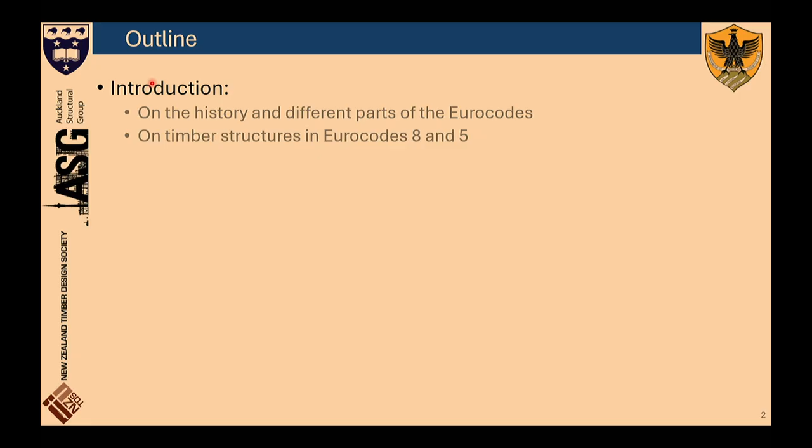Today, I'm going to share with you some facts about the revision of Eurocode 8 in terms of seismic performance of timber structures. I will start with a short introduction, quickly introducing the history and the different parts of the Eurocodes. Then I will talk about some modifications, in particular talking about timber structures in Eurocode 5 and 8. Five is timber design, and eight is seismic design. Then I'm going to give some very basics of seismic resistance of timber structures according to the Eurocode, and then discuss with you some of the main updates of the timber chapter of Eurocode 8.

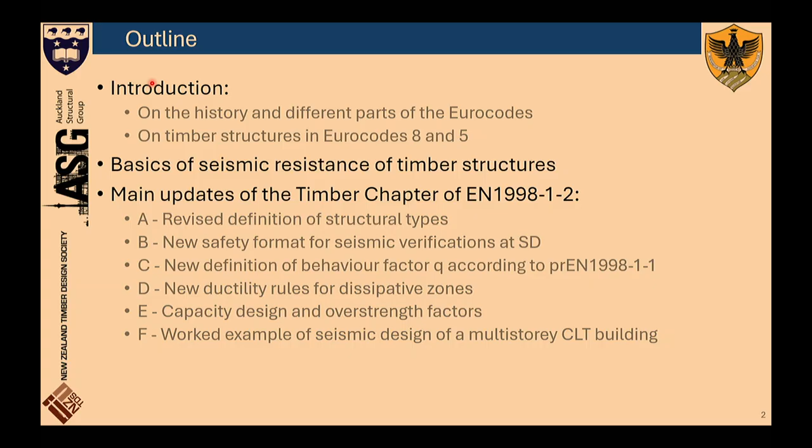We will go through the revised definition of structural types, new safety format for the seismic design at significant damage. Then we will go through the new definition of the behavior factor according to Eurocode 8, some ductility rules for dissipative zones, capacity design overstrength factors, and then I will conclude by giving you a link where you can download a worked example of seismic design of a multi-story CLT building, which unfortunately is in Italian, because the funding agency was the Italian Department for Civil Protection, and they said, we funded you, so this must be used by the Italian engineer. I said, but the Italian engineers know some English. They said, no, they don't know English, so you have to do it in Italian. But hopefully in the future, we are going to translate it also to English.

So first, history about the Eurocodes. 1975 is the year when the European countries decided that if they wanted to build a new Europe, they should make trade possible among all the countries. They identified having a common design code as a major way to avoid trade barriers - design, of course, in civil engineering. So in 1975 this idea began, and it took more or less 30 years to get the first generation of the Eurocode ready to be used in design.

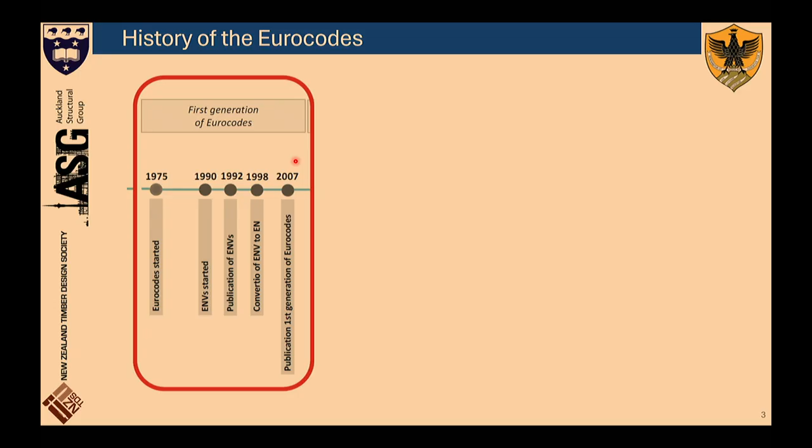Now, in 30 years' time, many things changed. You can understand, if you look back at what it was 30 years ago, it's completely different. We didn't have artificial intelligence, we didn't have mobile phones. So in 30 years, really many things changed. For this reason, in 2010 we said, okay, now that we are ready with the first generation, we need to start the new generation, the second generation, in order to implement all these changes that occurred in the first 30 years.

So it took some other years, as you can see. In 2015, we started this revision. We had what we call project teams, groups of six people, usually 2 academics, 2 people from industry, and 2 people from design offices, meeting together and trying to write the new version of all the Eurocodes. This was a long process, as you can see, and this process is still ongoing. After we write a first draft, it must go through a process of voting. All the 28, 29 countries must say yes, we are okay with this new revision, or no, we are not, or yes, we are okay but we want you to change this, this, and this. So this process took quite a lot of years.

So now we are here in 2025, and we still have to have the final vote on the new version of the Eurocode 8. Hopefully it will go well. If this goes well, 2028, in 2 to 3 years' time, will be the latest date for withdrawal of the first generation of the Eurocode. So the new generation will be in force from 2028. Look at this timeline: from 2010 to 2028, 18 years to get a new code, which is quite a lot, I would say.

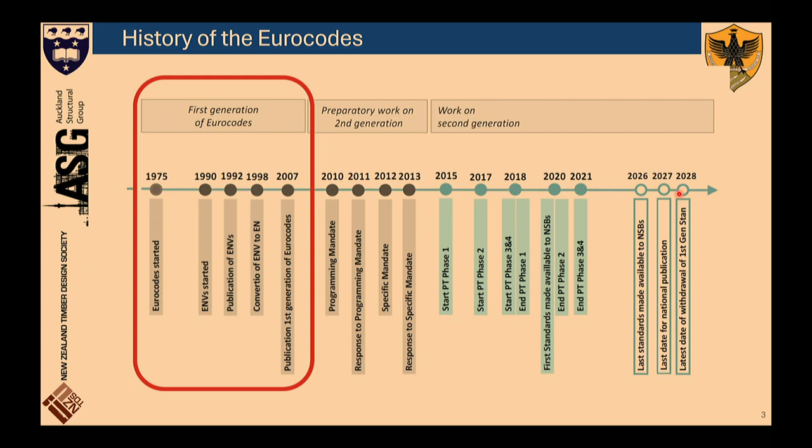Hopefully in Australia and New Zealand we will be faster than 18 years. But the problem is that in Europe we don't really have a United States of Europe, as you can understand. We have 28 different countries with different governments, so the whole process is very long. But hopefully in 2028 we will have the new version of the European code.

The Eurocodes are many documents. You can see here we go from Eurocode 0, basis of structural design, meaning limit state design, serviceability, and so on, through to Eurocode 9, design of aluminium structures. None of them is just one part, except EN 1990 which is one part. All the others have more parts.

I just wanted to highlight EN 1993, Eurocode 3, design of steel structures. We have 20 parts. So 20 parts of Eurocode if you had to design a steel structure, which is in some way a bit strange, because in my mind, when I was a student and also as a researcher, I would have thought designing a steel structure was fairly simple. Instead there were 20 parts covering all kinds of design: members, joints, silos, tanks, and so on. So altogether we have something like 40 parts across all the Eurocodes.

Now, some of those parts are material dependent. You can see here EN 1992 for reinforced concrete, steel-concrete composite, timber design in EN 1995, EN 1996 for masonry, EN 1999 for aluminium. Then we have some general horizontal parts: EN 1990, EN 1991 on actions on structures, covering everything but earthquakes, and then earthquake comes in EN 1998, seismic design, and of course EN 1997, geotechnical design.

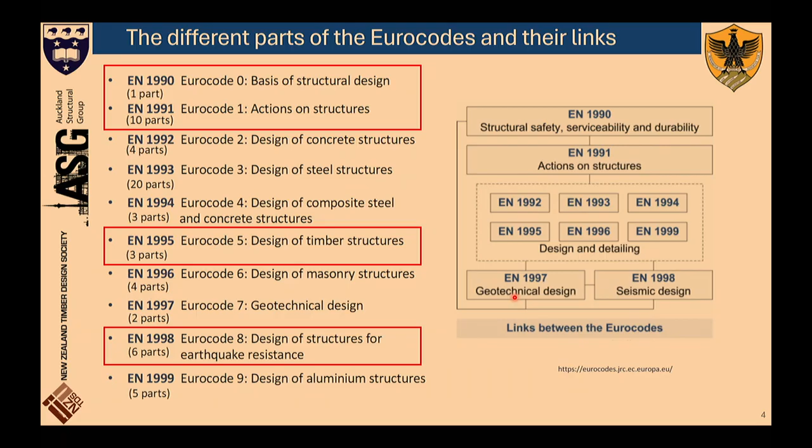So, in the current version of Eurocode 8, the timber part was only 6 pages. If you compare the current version of Eurocode 8, timber is 6 pages, reinforced concrete 40 pages, steel 40 pages, masonry 30 pages. So timber was just a fraction.

And of course we decided it was time to give more provisions to the designer, because otherwise there were just some general concepts. We were missing, in the older part of the Eurocode, things like all the capacity-based design principles and all the overstrength factors.

So in the new Eurocode 8, there will be a chapter dealing with timber design of 42 pages plus 6 pages of annex. So now in this new Eurocode we will have a similar weight in terms of pages for timber, concrete, masonry, and so on. This is very good news.

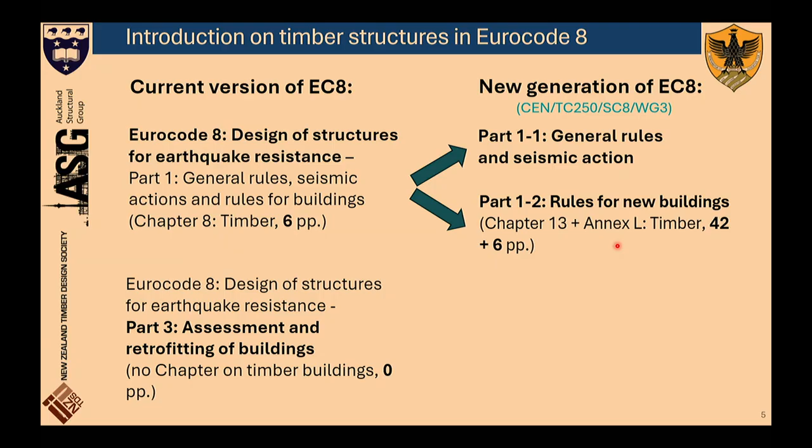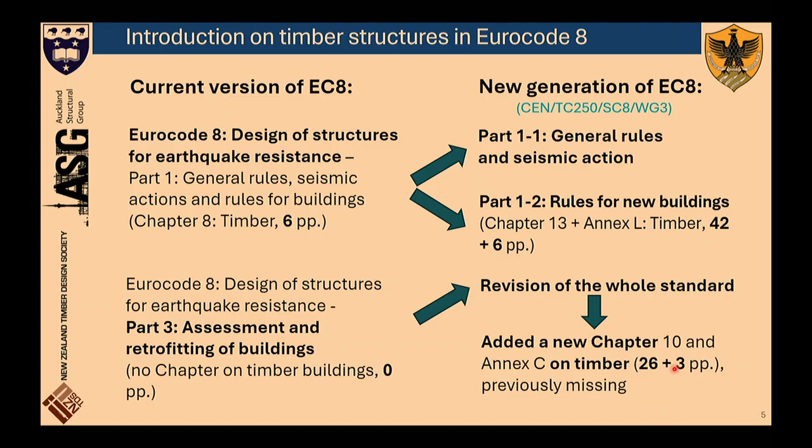Another important thing: there is also one part of Eurocode 8 dealing with assessment and retrofitting of buildings, which is very important when you are in an old country like Italy, or Europe in general. Currently there is no information on designing or retrofitting a timber building in this part. In the new part, there has been a revision, and they have added one chapter, 26 pages plus 3 pages, for the retrofit of an existing building in an earthquake-prone area, which is quite an important thing.

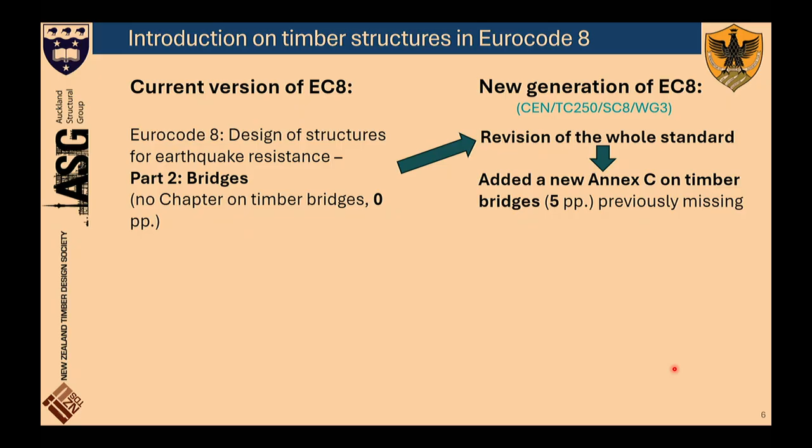There will also be one part of Eurocode 8 dealing with bridges. So if you want to build a bridge, you have a general part on bridges in the timber chapter in Eurocode 5. But then you also have one part of Eurocode 8 dealing with the seismic design of a bridge—currently no information. In the new one, there will be an annex with 5 pages. Not many, but much better than nothing.

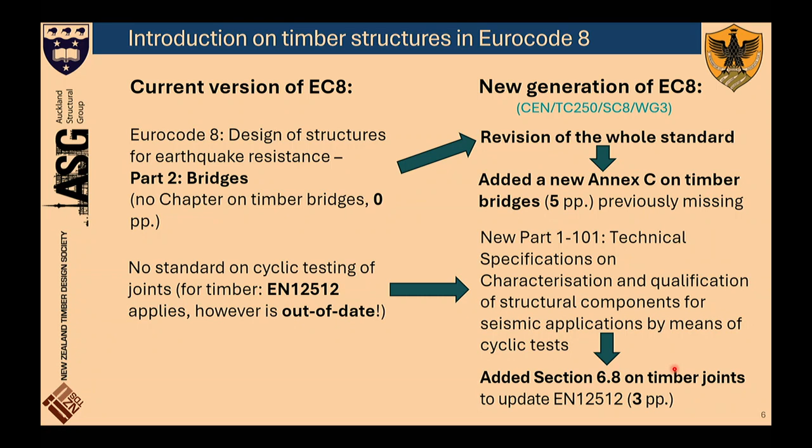Okay, I will skip this because it's not so important—it's just a design standard on how to test cyclically a timber structure. I will move instead to the current version of Eurocode 5. Eurocode 5, as we said, is what we need if we want to design a basic timber structure under seismic action. There are 3 parts.

EN 1995-1-1 covers general rules and rules for buildings, structural fire design, and bridges. All three parts have been completely revised, and there will be two new standards: one about execution, with lots of discussion about execution, because when it comes to building a timber structure, there are some things we need to check, like moisture content, etc. So there will be a standard about this.

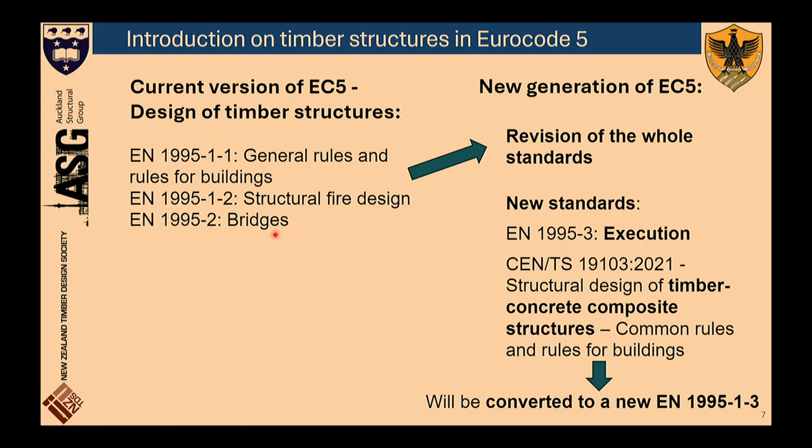And then another standard about the structural design of timber concrete composite structures. Timber concrete composite structures are being used more now, particularly in Central Europe. The idea is basically: what is a timber concrete composite structure? It's like a steel concrete composite, except we replace the steel beam with a timber beam, connected in some way with the concrete. Some basic seismic resistant timber structure, something you all know, but just to introduce some definitions according to Eurocode 8.

We will classify a timber design for earthquake action as either low dissipative structural behavior or dissipative structural behavior. Low dissipative means we design elastically in some way, and we just consider a small value of the behavior factor Q. The behavior factor Q is what in the New Zealand standard is called K mu. It's basically the value we divide our elastic spectrum by in order to take our seismic action into account.

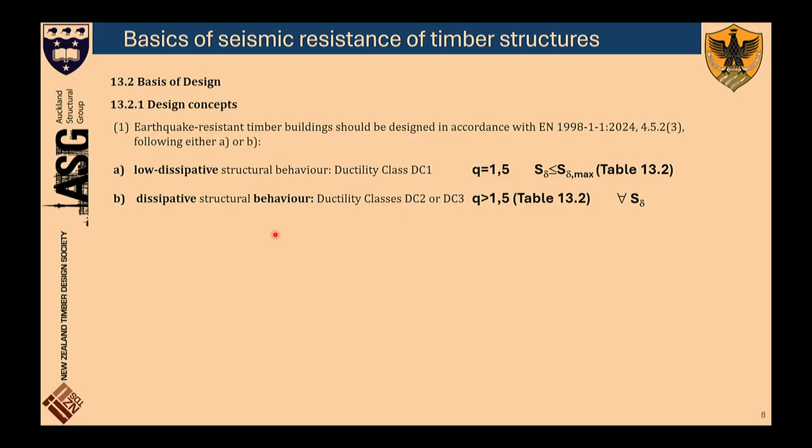Dissipative structural behavior instead means we are designing a dissipative structure so that we want some energy dissipation. In this case, we can get a higher value of the Q factor, in general more than 1.5. So in Europe now, for low dissipative structural behavior, the behavior factor is 1.5. For dissipative structural behavior, the behavior factor would be greater than 1.5.

Just to recap, if you have to design a small building like this for seismic action, what we need to take into account is what we call the seismic weight, which is the permanent action plus one fraction of the imposed action. So if there is snow, for example, if we are in a non-snow area, psi 2 would be 0. If instead we are at a height of 1,000 meters, psi 2 could be 0.2 or 0.3.

The seismic weight is multiplied by W, divided by G, which is the gravity acceleration, so W over G is the mass of our roof. This is multiplied by a coefficient lambda, then eventually multiplied by SR, the ordinate of the reduced spectrum. We have what we call the elastic spectrum, which depends on the seismicity of our zone, where basically we have acceleration versus the proper vibration period.

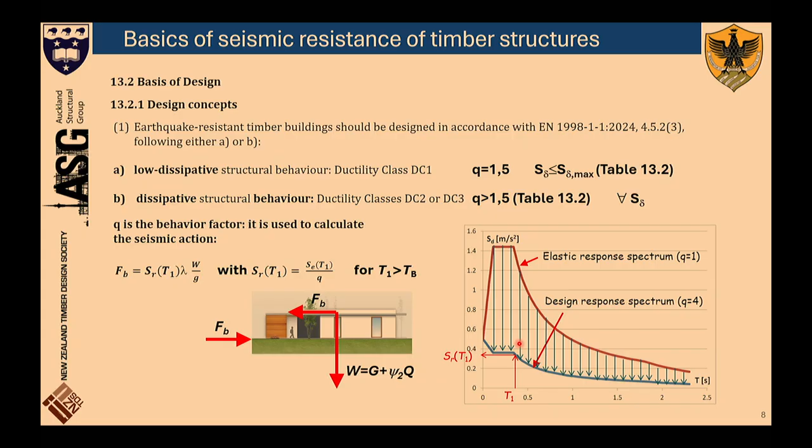The Q factor is what I said before, the K mu according to the New Zealand standard. It means we divide the elastic response spectrum by Q. For example, if we have a highly dissipative structure, we get a reduction of the spectrum. Then we enter with the proper vibration period of our structure, and we get SR of T1, which is our horizontal acceleration applied to the structure.

One important point of discussion when we wrote this new draft of Eurocode 8 was that in the old version there was no information on the structural systems that we can use in a seismic region. So there was an explicit request from engineers to place a table like this, where you can summarize with a sketch the type of structure, the type of lateral load resisting system, and then a short description of the structure.

Lateral load resisting systems we can use include, for example, cross-laminated timber structure, made of a solid panel, or a frame wall structure. Frame wall structure is what in New Zealand used to be called light frame construction. Now, for some reason, our colleagues from the United Kingdom decided to call it frame wall structure instead, partially I think due to the fact that in some countries, like Italy, the frame is not really light.

I mean, we're not using 2x4s, we rather use 4x8s. So maybe 'light frame' could be a bit confusing, so they decided to call it frame wall structure. Then we have log structures, where we use the logs or beams horizontally; this typology is mostly used in the Alps in Europe. And then we have other systems like moment-resisting frame structure, braced frame structure, or vertical cantilever structure.

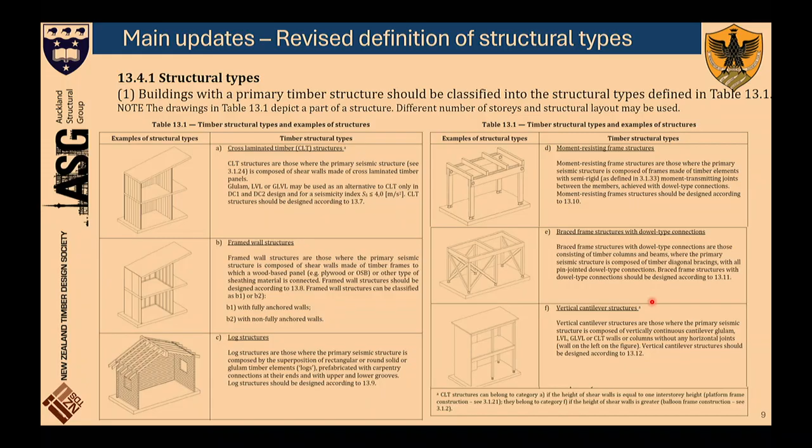The idea is that we have explicitly spelled out the different lateral load resisting systems, and for each of those systems, there are provisions regarding capacity-based design and also regarding the value of the behavior factor to be used.

When it comes to the basic safety formula for seismic verification of significant damage, which is basically the ultimate limit state, we have this relationship here, similar in some ways to the one in New Zealand, except that New Zealand uses the phi factor, the strength reduction factor, which is basically 1 over gamma m. Europe, instead of using the phi factor, uses the partial factor. So we divide our characteristic design strength by a safety factor, gamma m.

Now, this relationship is different if we are designing a dissipative zone, like a joint, or a non-dissipative zone. If we are designing a dissipative zone, we take the characteristic strength of our joint and divide it by a partial factor, gamma m, which is basically equal to 1, because the seismic action is considered as an accidental design situation, more or less like fire. So we don't use gamma m of 1.3 or 1.4 like for a static design. It means we are using a phi factor of 1, in other words.

Then we have K mod, the modification factor, which is K1 times K2 times K3, the different partial factors taking into account the influence of load duration or moisture content. And then we introduce this new coefficient K deg, called the strength degradation factor, or strength reduction factor for cyclic loading.

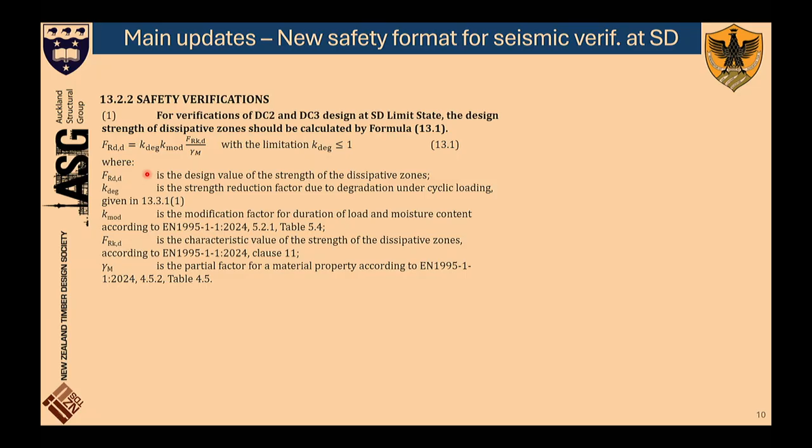If no tests are carried out, we suggest a value of 0.8. So in the end, when we design a dissipative connection, we take the characteristic strength and multiply it by K mod, K deg. According to the Eurocode, seismic is a very fast load, lasting between 10 and 40 seconds, so K mod is actually equal to 1.1, meaning we can increase the strength by 10%. We don't reduce the strength by the partial safety factor because this is regarded as an accidental design situation, but we do reduce it by 20% to account for cyclic behavior.

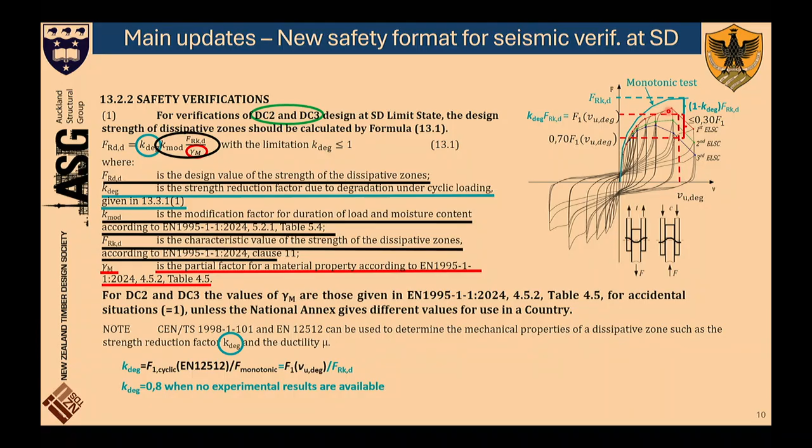This is only for the design of the dissipative part of the structure. The design of the non-dissipative part can be done with a normal design format: K mod, which is K1 times K2 or whatever, times FRK, divided by gamma m, times the phi factor. If we design a structure in DC1, as fully non-dissipative, doing an elastic design, we use gamma m with a value larger than 1. In other words, when designing a dissipative structure we account for degradation from cyclic behavior, but gamma m equals 1.

Instead, when we design a non-dissipative structure in DC1, we do an elastic design. We want to make sure our structure stays far away from plasticization. For this reason, we use a gamma m greater than 1—1.3, 1.4, 1.5—which is equivalent to using a phi factor of 0.7, 0.8, depending on the material.

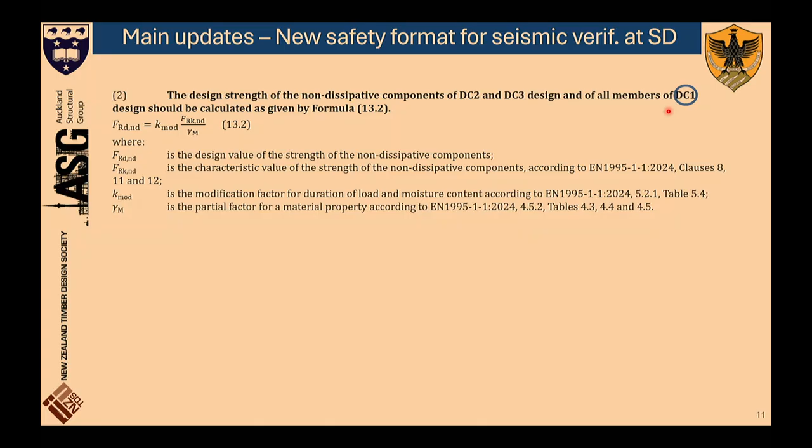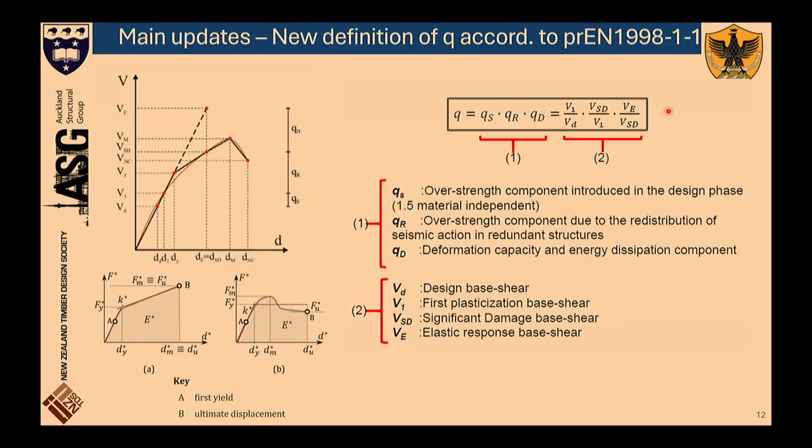Now, in terms of behavior factor, there was a request to provide, for each structural system, the value of the behavior factor, which is used to reduce the elastic spectrum. Just recall that the Q factor is what we call K mu according to the New Zealand standard. We were also asked to split this behavior factor into the product of three factors—QS, QR, QD—which have meaning when performing a nonlinear static analysis. But in the end, for the engineer, what really counts is the final value of Q.

So here is the table from the new Eurocode 8. For each of the different structural systems shown at the beginning, you have the value of the Q factor for DC1, meaning elastic design, non-dissipative or low dissipative; a value of the Q factor for DC2, which is a medium dissipative structure; and another value for DC3, which is a highly dissipative structure.

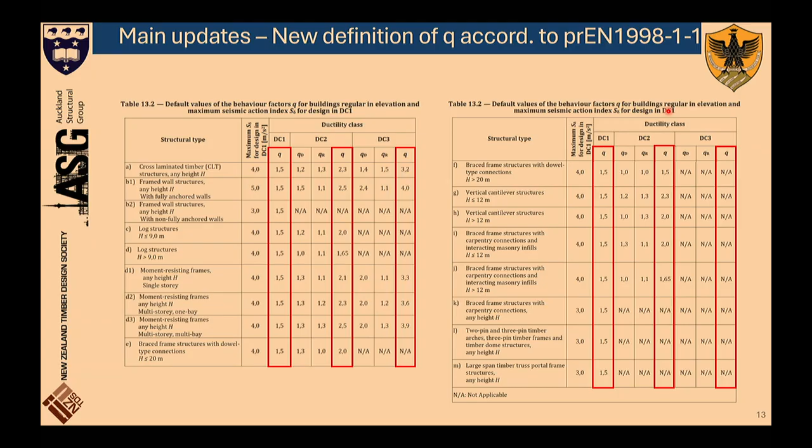The designer should pick the structural system he or she wants to design, then decide if it should be low dissipative or high dissipative. Once we choose the dissipative class, we have the behavior factor we can use. But we need to make sure the dissipative zone will have ductility high enough to ensure the attainment of this Q factor value.

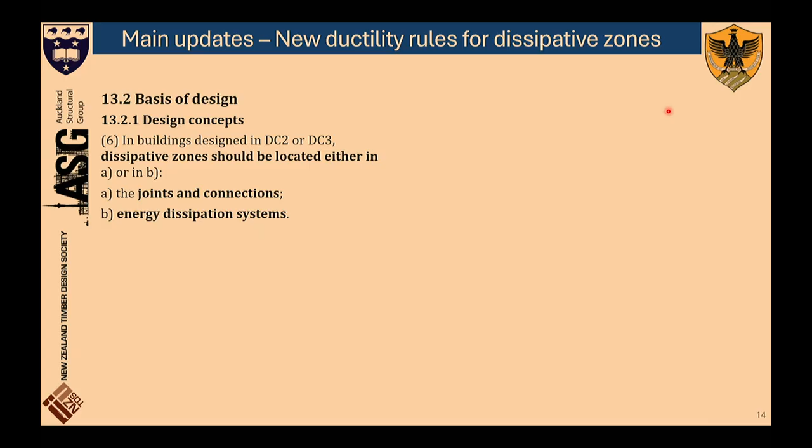An important concept from the very beginning of Eurocode 8 is that a dissipative structure made of timber behaves quite differently from one made of reinforced concrete or steel. When we study dissipative behavior of steel or reinforced concrete, we were told the plastic hinge forms in the beam, close to the joint, while the column and joint should be capacity designed for the strength of the beam itself.

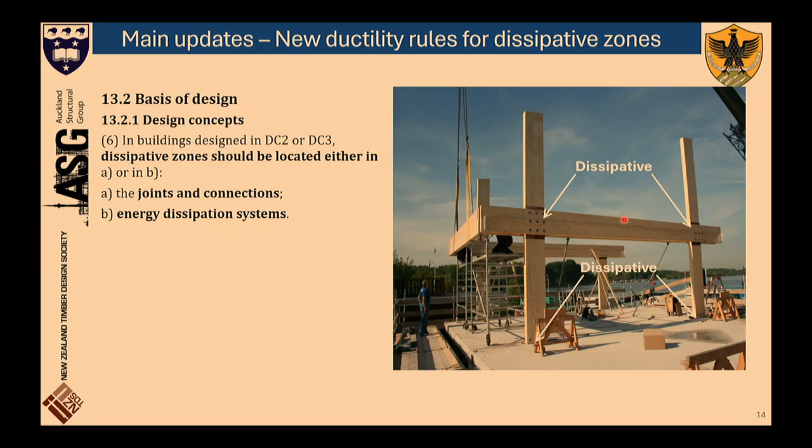Now for timber it's completely different. The dissipative component is the joint, while everything else, the column and the beam, shall be designed for the overstrength of the joint itself. So we spell it out from the very beginning: the joints are the only dissipative component, and the beams and columns shall be designed elastically.

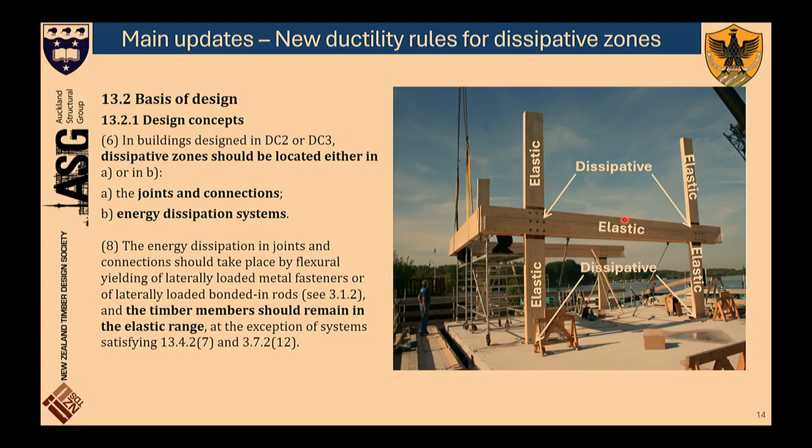The important point we wanted to clarify is that although a joint is 90% of the time made from steel fasteners - nails, screws, dowels, etc. - the fact that the joint is made from steel fastener does not necessarily mean the joint will behave in a dissipative fashion. We spell out that energy dissipation in joints and connections should take place by flexural yielding of laterally loaded metal fasteners.

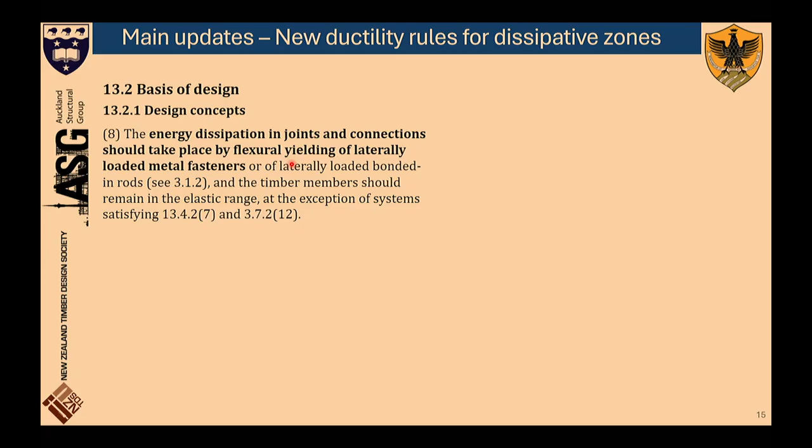This is the kind of failure mechanism we want to achieve in a dissipative joint. We want embedding of wood, but we definitely want to achieve some plasticization of the steel, because otherwise, as I'm going to show now, the behavior of the joint may not be sufficiently dissipative.

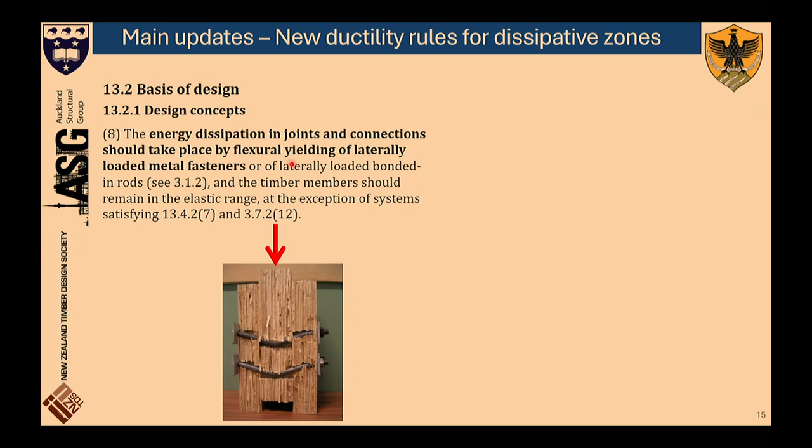This is because the literature is full of this kind of test. If you perform a cyclic test on a connection where you have formation of a plastic hinge in the fastener, as depicted in this figure, you see quite a significant hysteresis loop characterized by a significant area, which in some way measures the amount of energy dissipated by the joint itself.

However, if you increase the diameter of the fastener, you can still achieve the same ductility, but as you can see, for the same ductility, the area within the hysteresis loop is much lower, meaning the dissipated energy is much less.

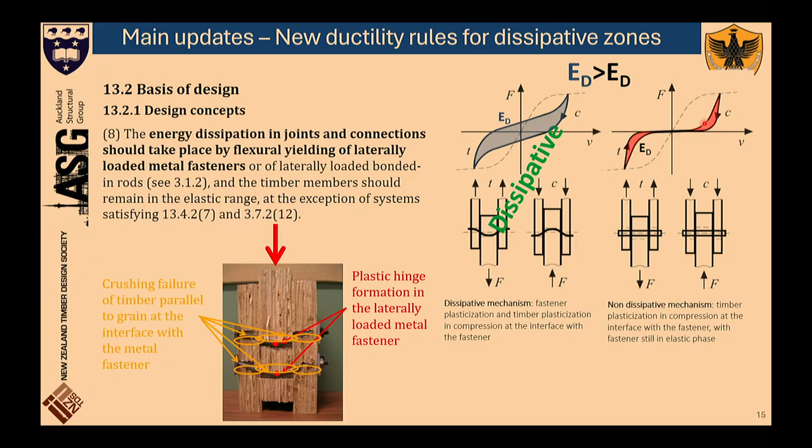So the conclusion is that yes, the dissipative zones are the joints, as long as we have flexural yielding of the fastener. Otherwise the joint, even though it may be considered ductile, cannot be considered dissipative in terms of seismic design. This one is regarded as dissipative, this one instead as non-dissipative.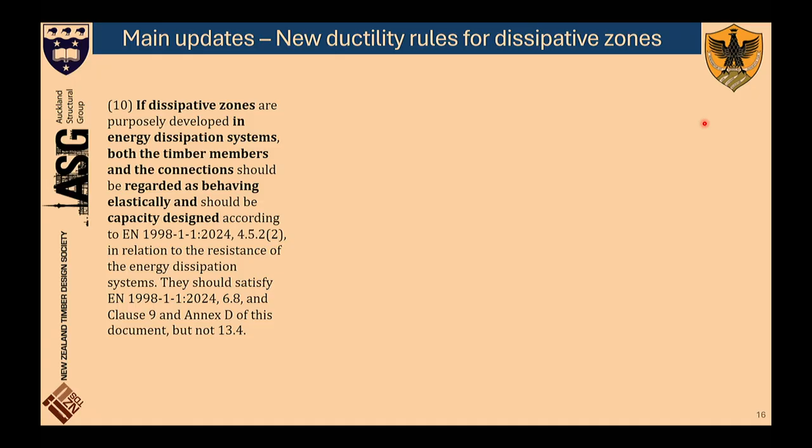Another option becoming more common in modern design is to concentrate plasticization in an energy dissipator, partly to avoid damage. This is an example many of you may know - a building built in 2011 or 2012 in Nelson, where walls made of LVL are pre-stressed, with energy dissipators - those plates with carved U-shaped metal - where the energy dissipation takes place during an earthquake.

In this case, the design philosophy is different, because we follow not the rules specifically for timber buildings, but the rules stated in Eurocode 8 for energy dissipators. Only the energy dissipator is designed for the reduced spectrum, and everything else - the wood and the screws - is designed for the overstrength of the energy dissipator. This leaves the door open for advanced systems not explicitly mentioned in the Eurocode, since the Eurocode is supposed to cover about 95% of all buildings.

So we couldn't really put all the different systems inside. We put just the most common one, but we left the door open for systems like this to be included, to be designed according to the Eurocode anyway.

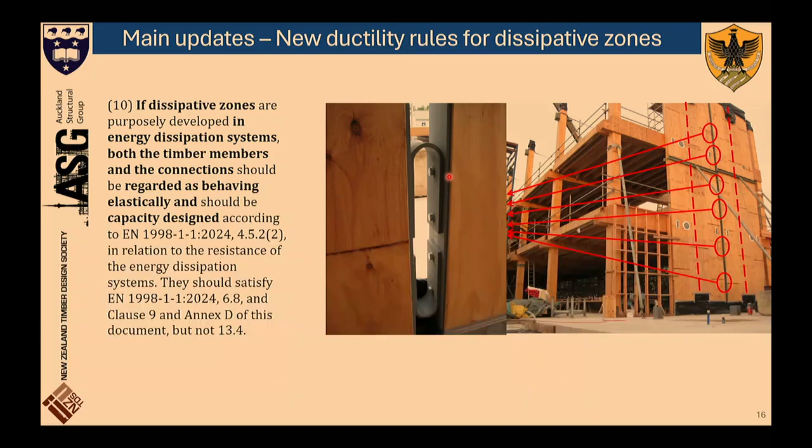Now, in terms of screws, very often we are using inclined screws. The inclined screws, as depicted in this figure here, are very lovely in some way because they are very strong and very stiff.

But on the other hand, we know that inclined screws have much less ductility compared to screws perpendicular to the shear plane. So we wanted to state clearly that inclined screws are OK in this design, also in DC2 or DC3, but they cannot be considered as dissipative. The energy dissipation should come from other zones, either energy dissipators or screws perpendicular to the shear plane.

Also here, hold-down connected with inclined nails. It's fine in terms of strength and stiffness, but this one also cannot be considered dissipative.

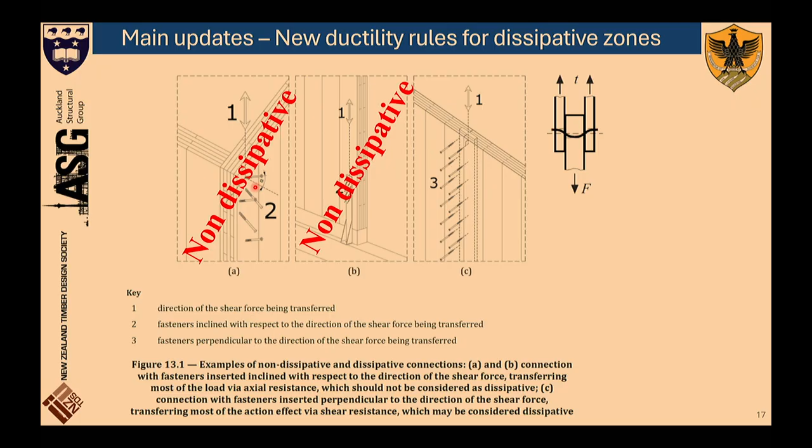Last but not least, we have a joint between panels with some screws perpendicular to the shear plane. This one may be dissipative or may not be dissipative. It depends on the failure mode. If the failure mode has at least one plastic hinge in the fastener, then this one will be dissipative. However, if there is no plasticization of the fastener, this one is also non-dissipative.

We wanted to state this very clearly because often it happens that a timber structure is designed by professionals or engineers who have not attended any timber engineering course. In Italy, we don't have many universities offering timber engineering courses. They are more common in Germany and Austria, but in Italy just a few universities offer them. So we want to state clearly that the design philosophy is slightly different when it comes to timber structures.

Now, I said before, we need to achieve this kind of failure mechanism. We don't want this kind of failure mechanism in the dissipative connection. How can we make sure that we have one and not the other?

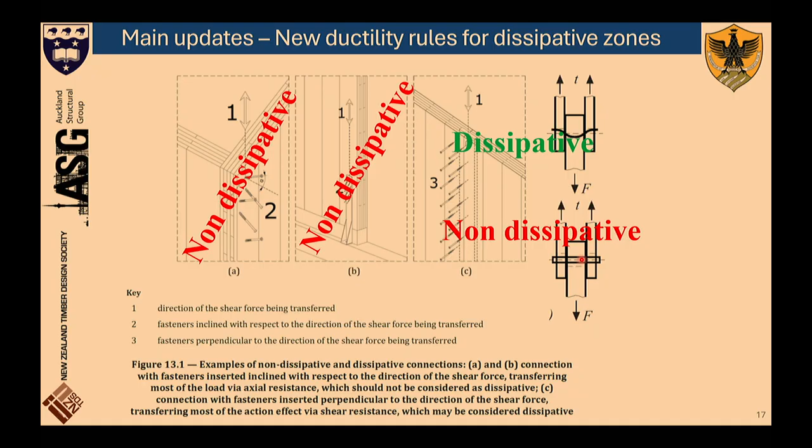Fortunately, when it comes to timber design, we have Eurocode 5, and now also the new Australia-New Zealand standard, there are formulas that allow the designer to find out not only the capacity of the connection but also the failure mechanism. What I'm showing now is called the European yield model, implemented in Eurocode 5 even in the old version, and it will also be implemented in the new New Zealand standard for timber design.

If you store this formula in an Excel spreadsheet, we can get immediately the value of the strength of the connection, but also the failure mode. In fact, if the minimum value of those six is the first, then we get a failure mode characterized by crushing of wood, embedding of wood, and no plasticization of steel.

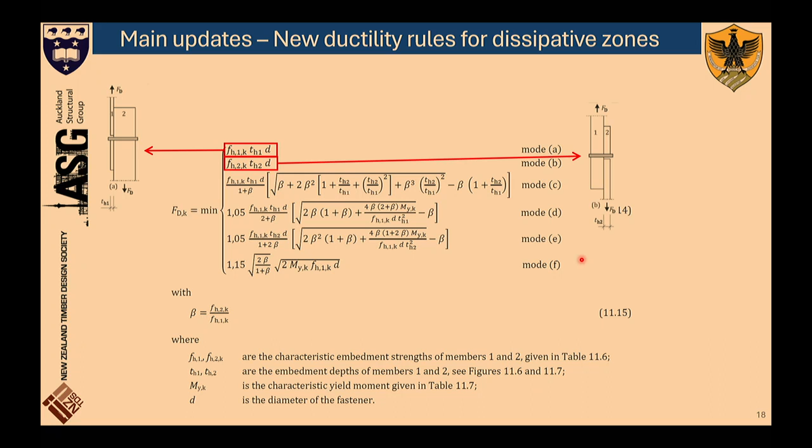With the second one, we get a similar kind of failure mode. With the third one, we have again no plasticization in the steel. Only if we get the fourth or the fifth do we have a plastic hinge formation in the fastener.

So if our joint should be designed as dissipative, we cannot have the first, the second, or the third failure mode. We can only have those three others. If we have this failure mode, it would be DC2. If we have this one, also DC2, and this other one here would be DC3.

Now, how can we make sure that we have in our dissipative zone either the fourth, the fifth, or the sixth mode? Basically, we calculate the minimum of the non-dissipative failure modes and the minimum of the dissipative failure modes, and then, using this design inequality, we apply a safety coefficient of 1.2 between the non-dissipative and the dissipative one.

Why do we introduce this criterion? Because without it, it may happen, for example, that the lower value of the dissipative mode is 10 kilonewtons, and the lower value of the non-dissipative one is 10.1. So theoretically we should have a dissipative failure, but the difference is so small that, considering the scatter of timber properties, it's very likely we actually get a different failure mode instead.

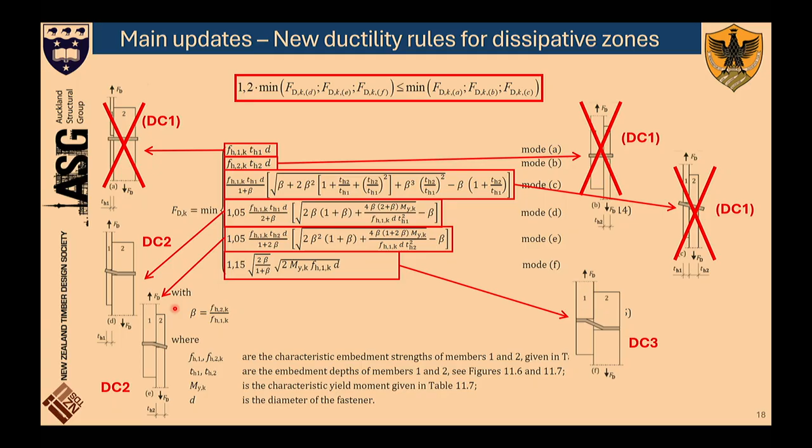So to make sure that only the wanted failure mode will occur, we use this coefficient of 1.2 as a safety coefficient between the dissipative and the non-dissipative failure modes.

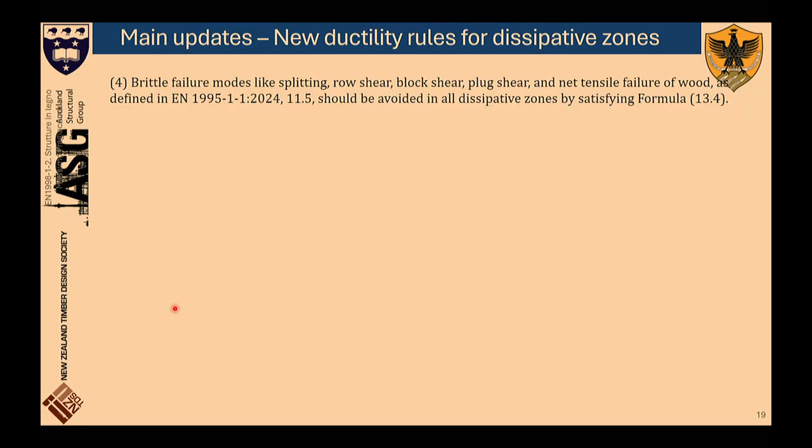Another thing we want to avoid is a brittle failure, which may occur just around the connection. So those are all failure modes that may occur in a timber connection. You can see splitting, row shear, block shear, plug shear, net tensile failure. They're all brittle.

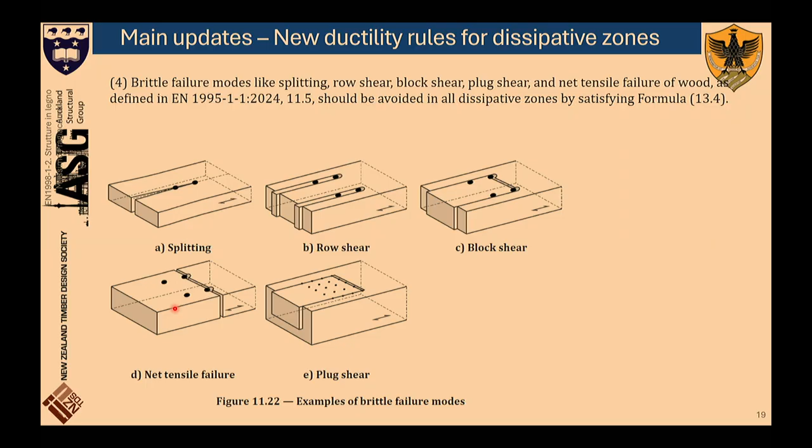So we need to make sure those failure modes will not occur. How? Using capacity design. This means that when I do the verification, for example for splitting or row shear, I take the value predicted by the European yield model, the formula we saw before, which is the dissipative one, and multiply this by the overstrength factor, which could be 1.6 or 1.3, then divide this by the strength degradation factor, 0.8.

So 1.6 divided by 0.8 gives the number 2 that you have in the New Zealand standard. In the old New Zealand standard, there was this number 2 considered as the overstrength factor. This means the strength of those brittle failure modes must be twice as much as the strength of the dissipative failure mode, in order to avoid this kind of brittle failure mode.

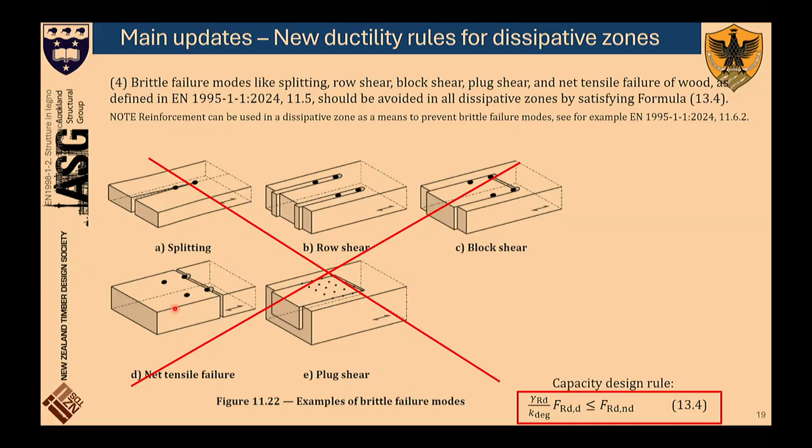There's also another way, which is to use reinforcement. This can be designed as a ductile connection. You see there are some dowel pins in a corner joint. Unfortunately, when you test this kind of building, often you get this kind of crack, which is very brittle. So to prevent this crack, we can think about using some reinforcement, using screws to basically stitch and prevent this crack from forming.

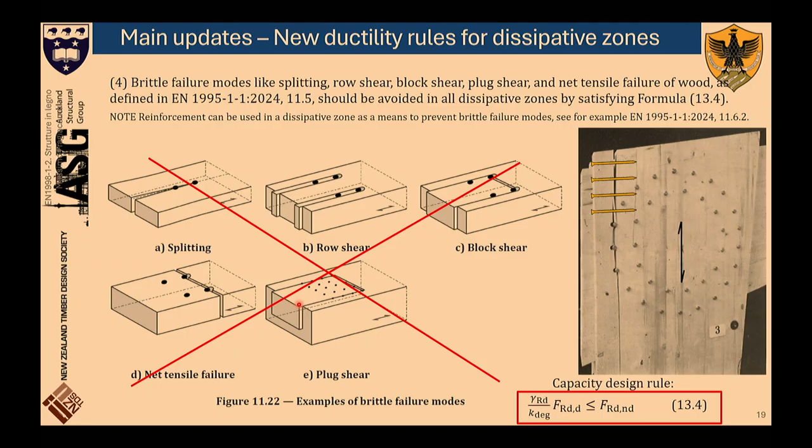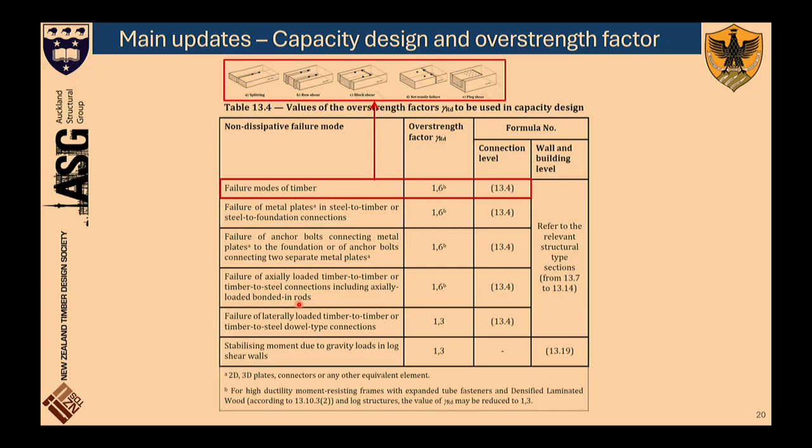In the new Eurocode 5, there will also be rules given on how to design this kind of reinforcement. The overstrength factors, with values 1.6 or 1.3, really depend on the failure mode. There is a table showing that if the failure mode is very brittle, the overstrength factor is 1.6. Again for brittle failure of the hold down, 1.6. For tear out of the anchor, 1.6. And for withdrawal screws, again 1.6.

This 1.6 can be reduced to 1.3 if instead you have a connection where your screws or nails are perpendicular to the shear plane. Because in this case maybe we don't have dissipation, since we only have crushing, but the behavior is definitely not brittle, it's more ductile. So in this table the designer can find the value of the overstrength factor.

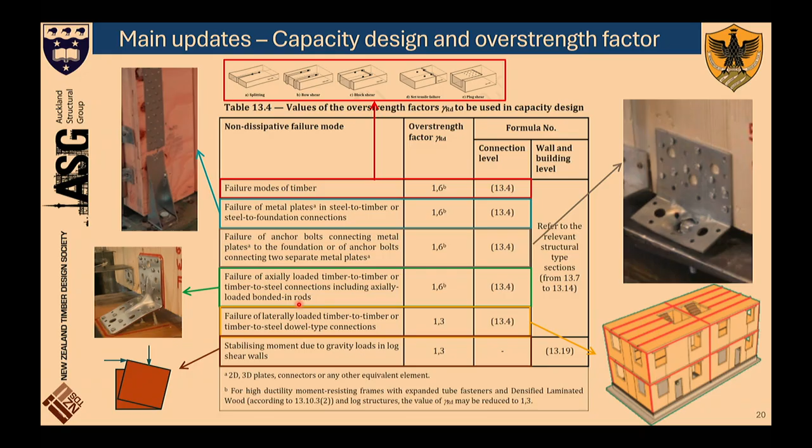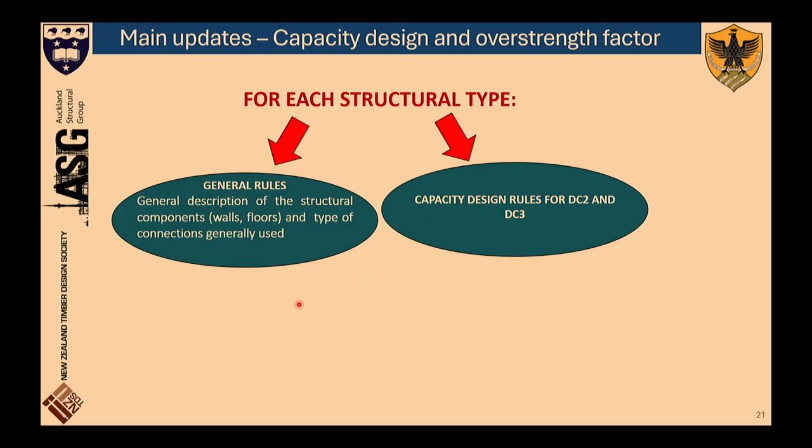As I was telling before, for each structural type—frame wall structure, CLT, log house, etc.—there is a chapter in Eurocode 8 giving general rules and then capacity design rules for designing DC2 and DC3. Those capacity design rules can be at building and wall level, and also at connection level.

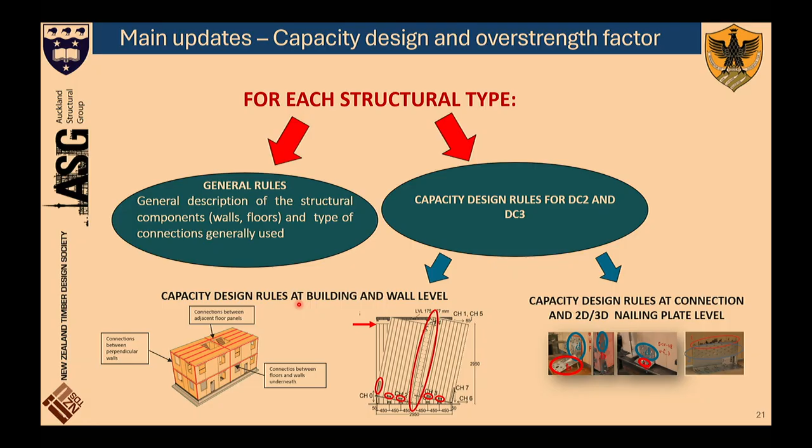You can see here some connections that were not well designed, because the dissipative part didn't fail, but the brittle part failed instead. This means the actual anchor connection was not well designed. So the most important thing missing in the old Eurocode was defining what are the dissipative zones for different structural systems.

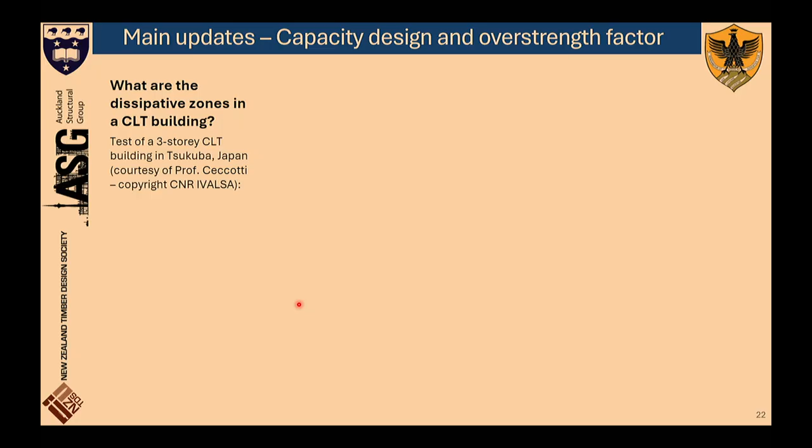For example, when it comes to a CLT building, what are the dissipative zones? Fortunately, many tests have been performed, some on shaking tables. This test I'm going to show you was performed by Professor Ceccotti from the National Research Council of Italy in 2007-2008 in Japan.

This shows clearly, the shaking table test shows clearly, which one was the dissipative failure mode. If you look at the video, you can see quite clearly some of the wall panels rocking in this way. So basically, the dissipative failure mode of a building like this in CLT is rigid rocking of the panel—the panel itself is almost rigid.

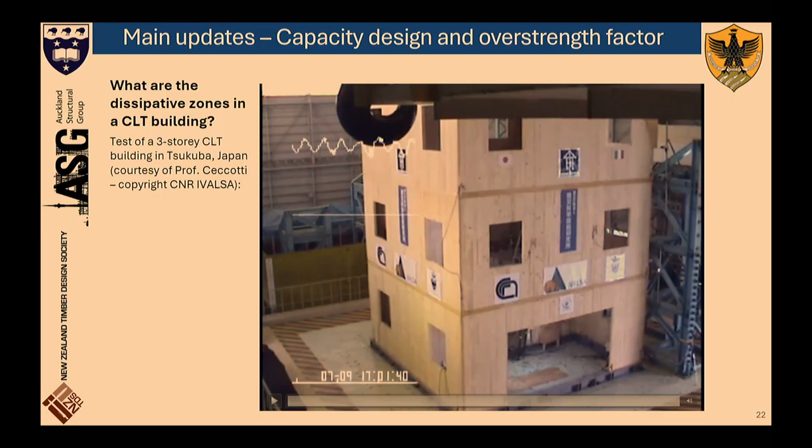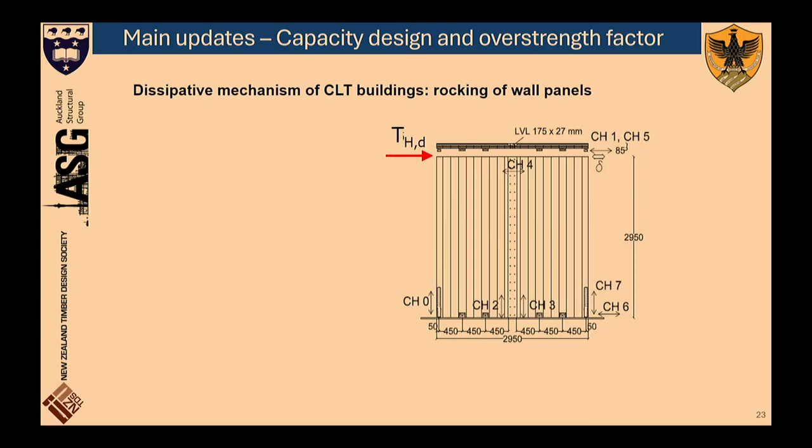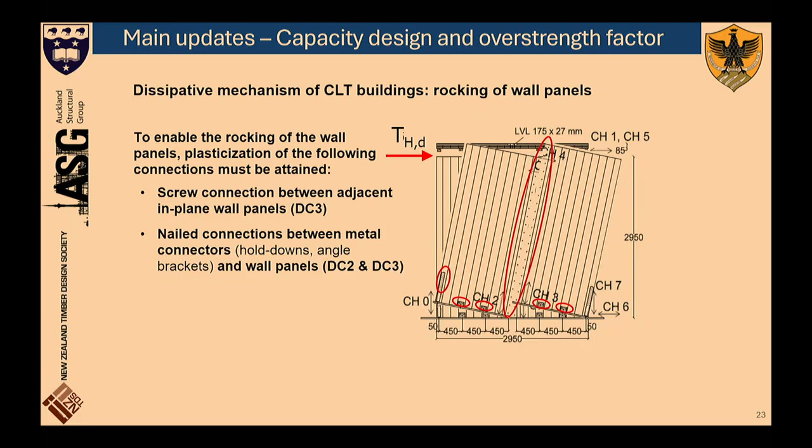So all the plasticization must occur in the connections between the panels themselves. If we have a wall made of two strips of CLT with an intermediate joint, this would be the dissipative failure mode, meaning we have to design the screw connection between the two panels, and also the nail connection between the angle brackets and the wall, and the hold down and the wall, to plasticize.

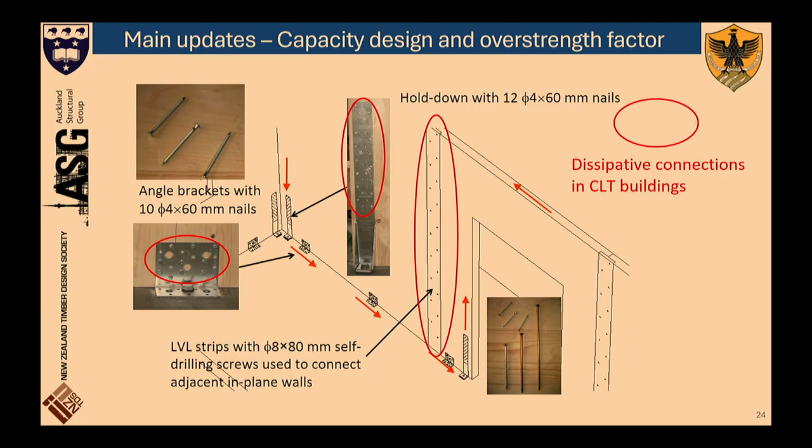CLT buildings can be designed in DC2 with a behavior factor Q of 2.3, or in DC3 with a Q factor of 3.2. The most important difference between these two kinds of design: in DC2 you can see there are just few vertical joints between the panels.

In DC3, rather than having one monolithic wall, we have more strips of panels connected with these vertical joints here.

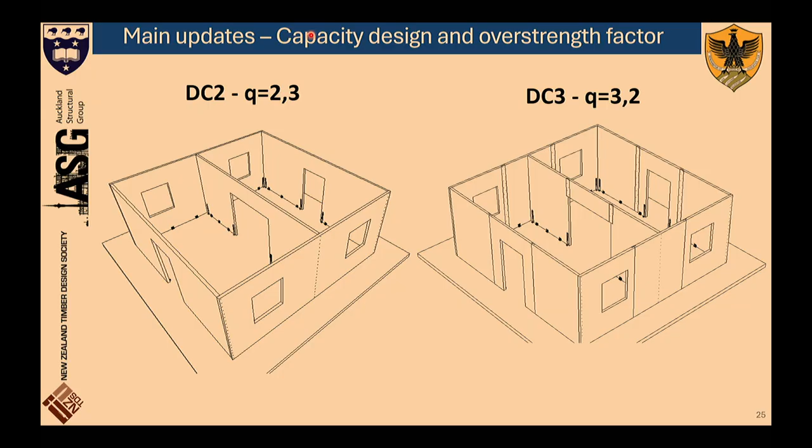I would say in Europe, usually, particularly in Central European countries like Germany or Austria, this is the way to construct: to cut the whole wall, as long as the whole building, making as few walls as possible to construct the building. In this case, the behavior factor is 2.3, so the K mu would be 2.3.

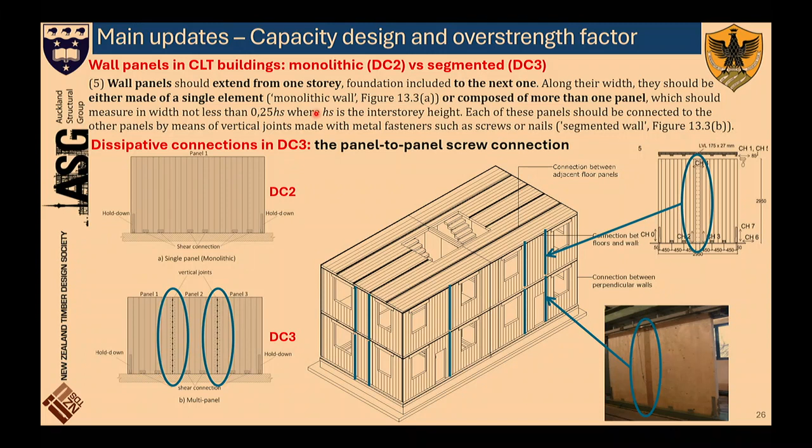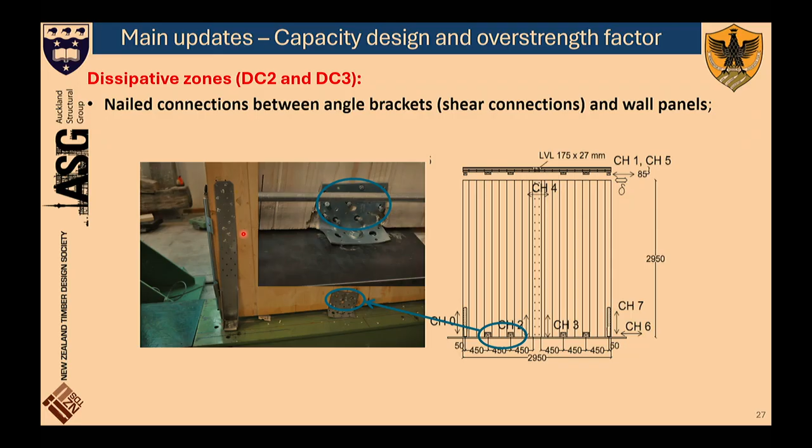So again, in blue now, those are the dissipative joints - the joints that we are going to design for the ordinate of the reduced spectrum, the elastic spectrum divided by 2.3 or 3.2. This includes also the nail connection between the angle bracket and the wall, and the nail connection between the hold down and the wall itself.

Once we have designed those blue connections as dissipative, just recall that we need to make sure the screws and nails are perpendicular to the shear plane, and that we have a failure mode characterized by 1 or 2 plastic hinges to make these connections dissipative.

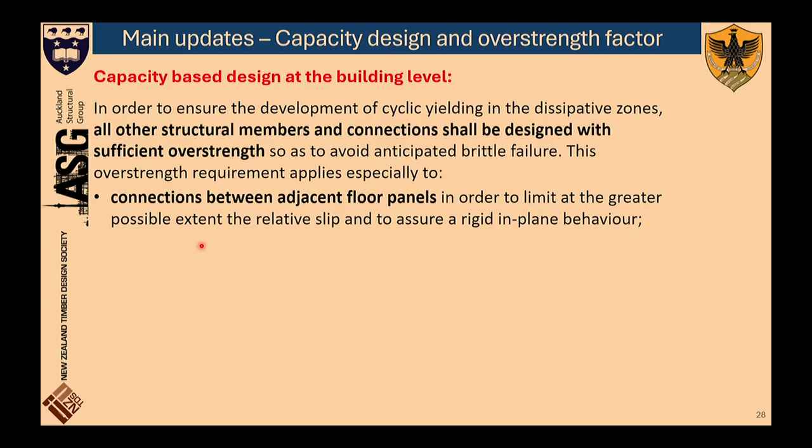Once we have designed those connections as dissipative, we have to design the rest of the structure. The idea is that all the rest of the structure shall be designed for the overstrength of those connections - for example, the joints between panels forming the floor shall be designed for the overstrength using an overstrength factor of 1.6.

Also, the joints between the panels and the wall underneath shall be designed for the overstrength using an overstrength factor of 1.6 of the dissipative zone. And also the corner joints, or let's say the vertical joints on the corner between the walls, shall also be designed using capacity-based design.

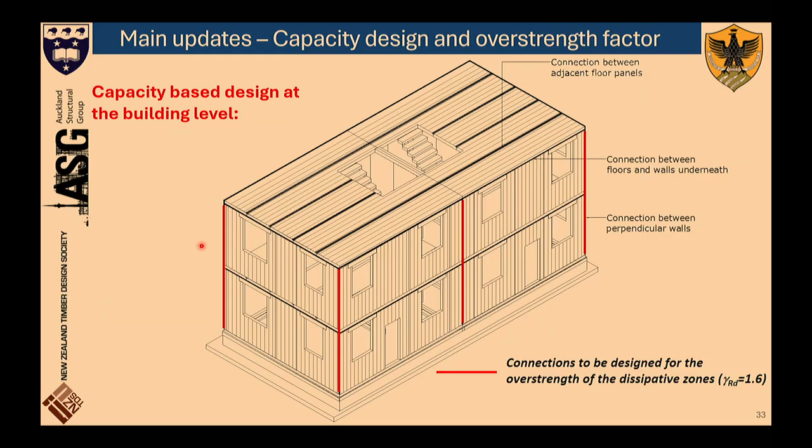If we have a wall with a big opening like this, when it comes to checking the level of strength here, again we need to use the overstrength factor. We need to use capacity design to find out, from the equilibrium and the strength of this connection, the value of the force that we have in this corner.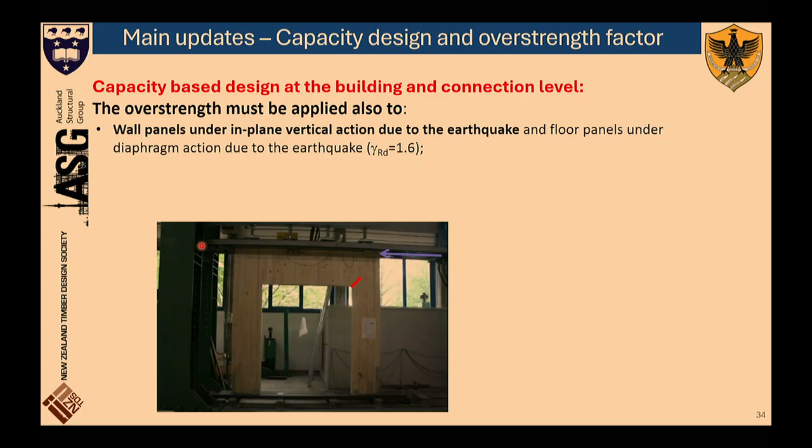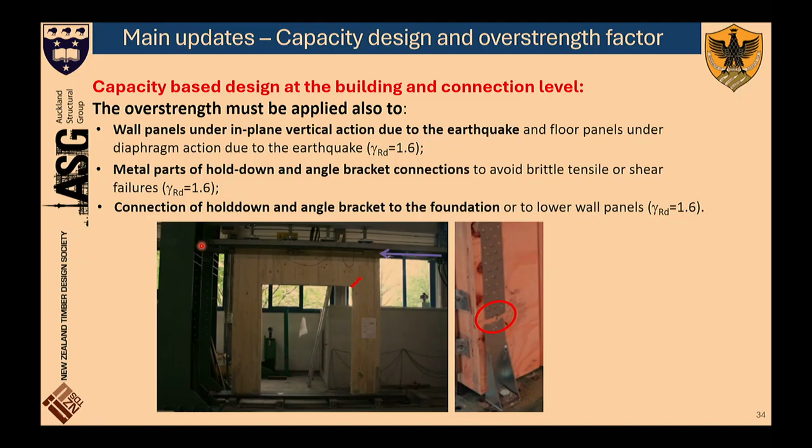Again, when it comes to designing, for example, the hold down, you can see here a kind of failure mode that was unexpected. The idea was that this part should have been plasticizing. Instead, we got plasticization of the steel bar, the steel plate, meaning this hold down was either too slender in terms of steel, or there were too many holes on the strap, on the panel.

That's why, according to the new Eurocode, we will require basically to check, to apply capacity-based design also at the connection level.

So here you have 4 examples of brittle failure modes that should not have occurred. Why did they occur? Because very often, off-the-shelf hold downs were not correctly designed - they were initially designed just for strength and stiffness, but not for ductility.

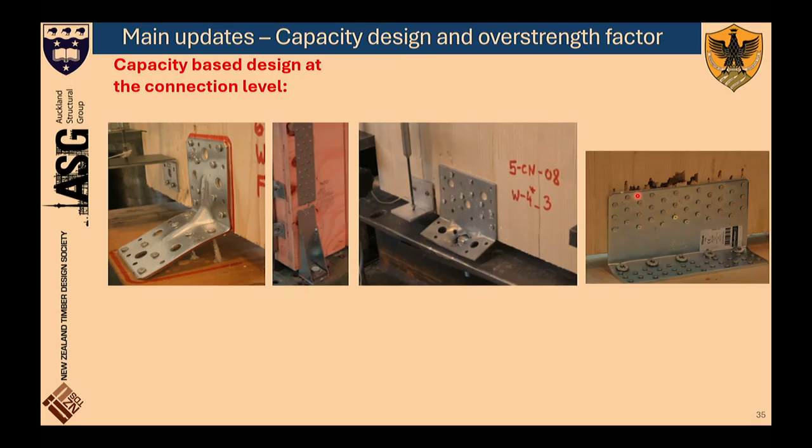Again, you see, for example here, we have a withdrawal of screws, of nails, rather than plasticization of the nail. Also here, failure in the plate rather than plasticization, same thing here. Here, failure also in the wood. So the idea is that those connectors should be designed using capacity-based design.

Starting by designing this blue connection as ductile - how can we design this connection as ductile? Well, we can use, like we said before, the Johansen equation, this one, and we can make sure the failure mode will be characterized by this formula here, basically using this relationship above.

Once we have made sure that the ductile connection is characterized by flexural yielding of the fastener, then we need to design the rest of the system.

For example, we need to design the withdrawal strength of this screw, or the thickness of the plate, or the strength of this anchor, or the strength of the wood using capacity-based design, which means we cannot design those members for the action coming from the elastic spectrum, or the reduced spectrum, but we need to calculate the force FED by multiplying the actual strength of the nails by the overstrength factor, which is 1.6, divided by Kdeg, which is 0.8.

So basically, the FED, when designing the thickness of the metal plates, the strength we need to use for this verification is not the strength of the nails, but the strength of the nails multiplied by two, twice.

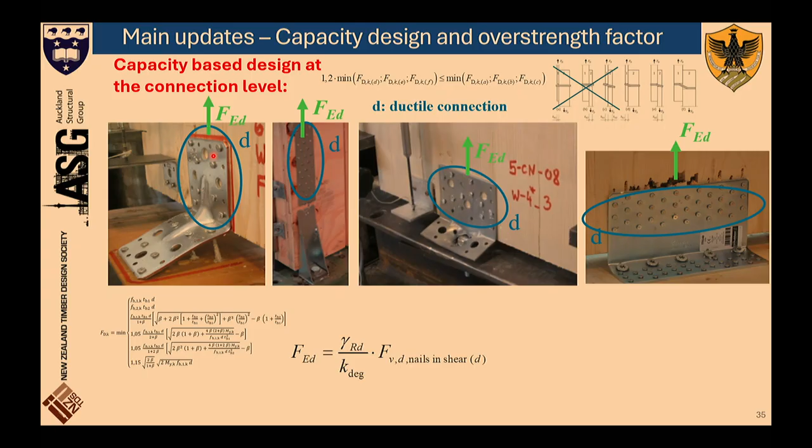Another important thing we are towards the end of the presentation, we wanted to make sure is to avoid the soft story mechanism. This is another important thing we know very well from reinforced concrete. We don't want to have a soft story mechanism. A similar thing may occur also for cross-laminated building or for light frame construction.

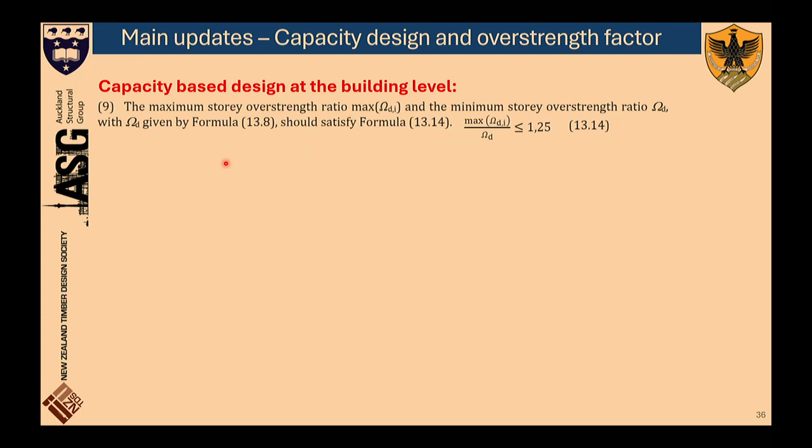So in some way we stole this clause from the steel part. The concept behind this sentence is that when we have a timber building, or in general any building, we have a kind of distribution like this in terms of seismic demand. Of course it's lower above and higher here, because this is behaving like a cantilever.

Now, the important point with this relationship is that there is a kind of constant ratio between the shear capacity in blue and the shear demand in red. So we want a constant ratio in order to try to promote, if possible, a full plasticization across the whole height of the building.

For this reason we put this clause there. Because if we kept the shear capacity constant along the height, for example using the same number of hold downs, the same number of screws, the same number of angle brackets all around the height, then we would for sure promote a soft story mechanism, and we would have less energy dissipation. So again, this clause is aimed at avoiding a localized plasticization in the structure.

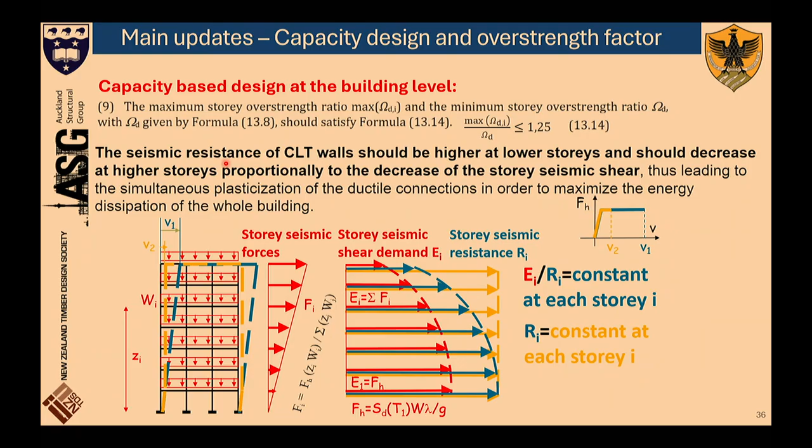Now, just before the conclusion, I told you before about this worked example of design of a multi-story CLT building. This was a very useful exercise to try to test the new Eurocode 8, because there were many different question marks, for example the value of the overstrength factor. We are talking about, for timber, 1.6 divided by 0.8, which is 2, quite a high value, meaning we need to increase our forces by 100%.

And we wanted to test some other clauses too. So for this reason we developed this worked example, design of a multi-story CLT building, funded by the Italian Civil Protection Department. It's a seismic design of a multi-story CLT building in a high seismicity area close to L'Aquila. We're talking about a peak ground acceleration of 0.35g, which is not so high compared to Wellington, but not so low compared to other parts of Italy. For us, in Italy, 0.35g is the maximum.

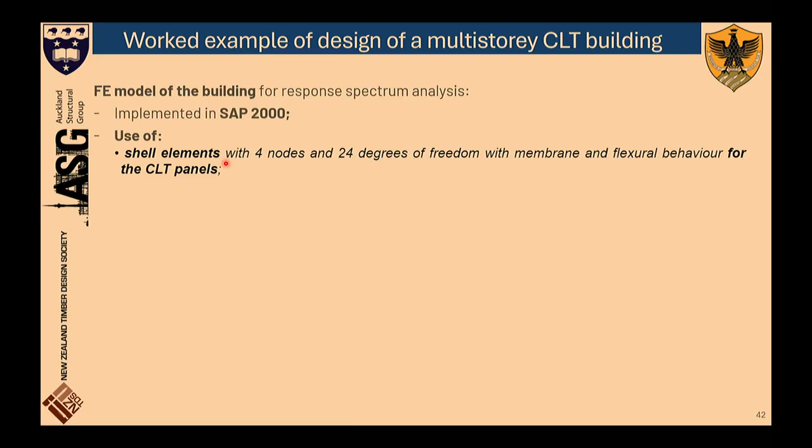In the future it will probably increase, because historically, in the last 50 years, the peak ground acceleration has increased all over the world. It seems we are having more and more dangerous earthquakes, so it may increase. Anyway, we used a finite element model with flexible connections, and also response spectrum analysis, which means a linear dynamic analysis. This is the kind of building we are talking about. There is a finite element model implemented in SAP2000 using shell elements.

But the most important thing, actually, is that when we model a building like this using a finite element model, it's very important to remember that those shells cannot be glued together. I remember very well, at the very beginning we were revising some work coming also from engineers in Italy designing with timber.

Often they were losing hours and hours to have very refined mesh, but then they were not modeling the connection. So the important point to consider is that it makes no sense to lose hours to have millions of shell elements after we don't model the connection themselves.

Now, modeling the connection is fairly complex. Here we provide a simplified kind of possibility. So for example, the angle brackets, the flexibility of the angle brackets, they are modeled using this kind of diagonals, flexible diagonal, and so on.

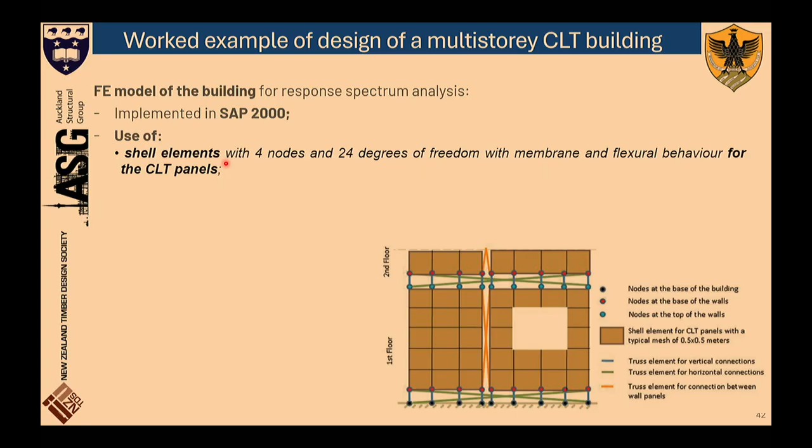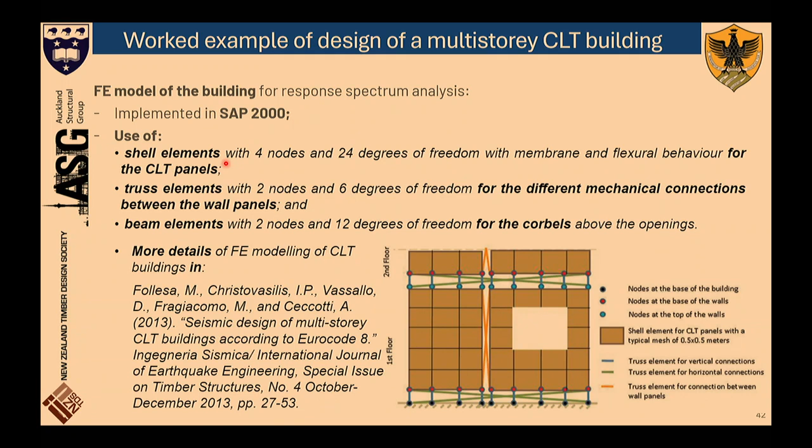So we can find more information about this in this paper that is freely available. If you want, you send me an email, I can send you this paper, which is in English. This paper here is in English and Italian, so this is fine, there's not a problem.

However, as I said before, this work example, unfortunately, is in Italian. It's like, I think, 200 pages, even more. So all the verifications are all reported. However, it's freely available. Here you have a link.

And then you need to go, everything in Italian, you need to go to this one, which is Chapter 4, Timber Construction. And then you get a file, a PDF file, which is called Allegato 4, Annex 4, Chapter 4.pdf, which is freely available. Of course, it's in Italian.

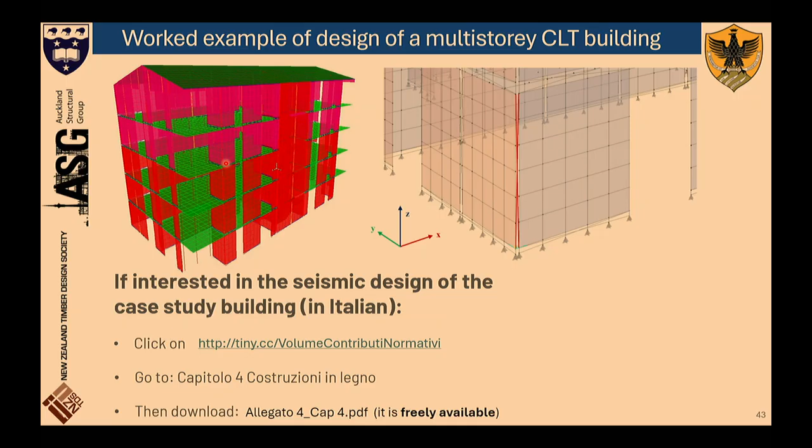It's not the best solution for you, but on the other hand, the formulas are international. And now with all this program about artificial intelligence, Google Translate, etc., since this file is not protected, you can select pages, put them in your translator, and get at least the sense of what is written there, if that may be useful.

Now I'm going to conclude, definitely. So just to wrap up a little bit, I would say that this timber chapter of the Eurocode 8 is definitely a step forward in the design of timber buildings. We have finally different structural types, different lateral load resisting systems, all spelled out quite clearly. We have a complete description.

We have updated values of the Q factors based also on the results of all the tests that have been done all around the world. I didn't mention at the beginning because I didn't have time, but in terms of testing, full-scale testing, there have been lots of testing going on, performed on timber structures. All timber building testing on shaking tables. So we have a lot of knowledge.

I would say, I don't want to say more than reinforced concrete or steel because it's not true. But on the other hand, we have very updated knowledge that we could basically use to update the value of the Q factor, for example.

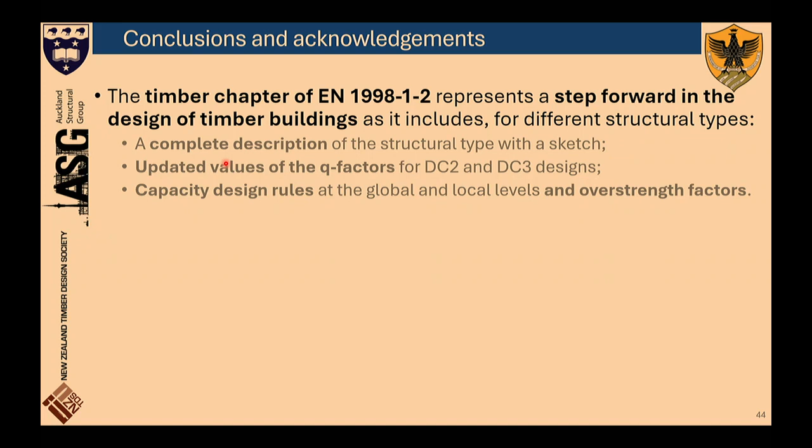We have capacity design rules very clear at the global and local level, and all the overstrength factors that were missing. And also a new safety format for design of significant damage. There is also, but I didn't have time to discuss, an annex regarding nonlinear static analysis. So we have some formulas in the annex for nonlinear static analysis of timber buildings.

In my opinion, it's still too early because the most important difference between timber building and, let's say, reinforced concrete and steel, is that for reinforced concrete and steel we have a clear formula to calculate the ductility of a plastic hinge. When it's for timber, we are not still ready, we are not yet at that point. So we don't have a clear formula to calculate in a rotation what is the actual ductility of the rotation. In this way, we are still a bit behind, I would say, compared to the other materials.

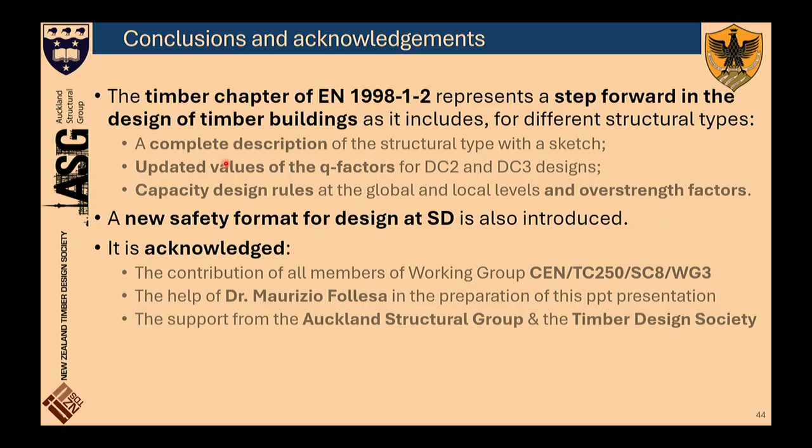Just want to acknowledge that, of course, I'm here to present this, I have the privilege to chair this working group, but this work is a result of an interaction with many other people from Italy, from Germany, from other countries. So it's really a joint effort in the end. And I want to acknowledge the help of Dr. Maurizio Follesa, who did a PhD on this subject here several years ago. He's now a practicing engineer in Italy. And of course, last but not least, the Auckland Structural Group, so basically you, and the Timber Design Society that invited me to be here and to present this to you.

So that concludes my presentation. I hope we have some time. I hope I'm not too late, I didn't check my time, to be honest. So I hope we still have a bit of minutes to get some questions, if you want, or some comments on what I've been presenting. So thank you very much.

I'm expecting some questions, particularly on this.